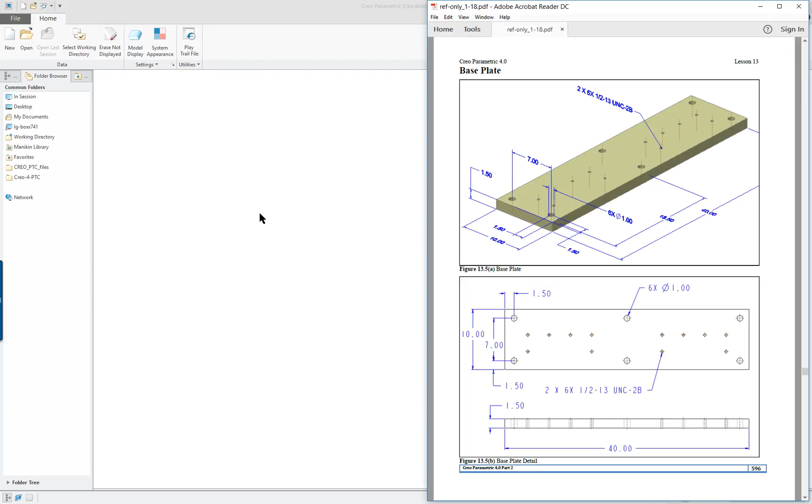In this section of the lectures for Lesson 13, I've broken them up into small pieces. This is just going to be to create the base plate. So we're going to create a new part.

It's coming in this odd shape because this is trimetric. I'm not going to go and change it to isometric, I'm just going to turn it a little bit. I'm going to sketch on the top datum plane in this case.

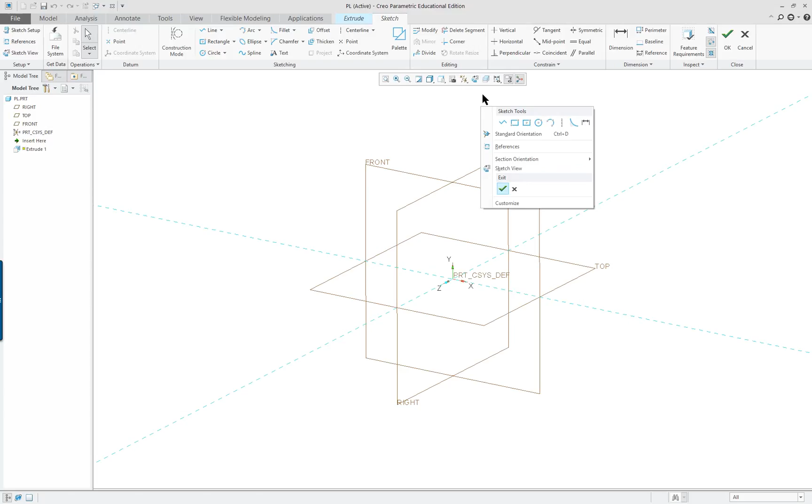Let's go over - you'll notice I put this in customizing my pop-up. I put the sketch view here; I got sick of going way up here for it. And I also put the center rectangle here on my pop-up.

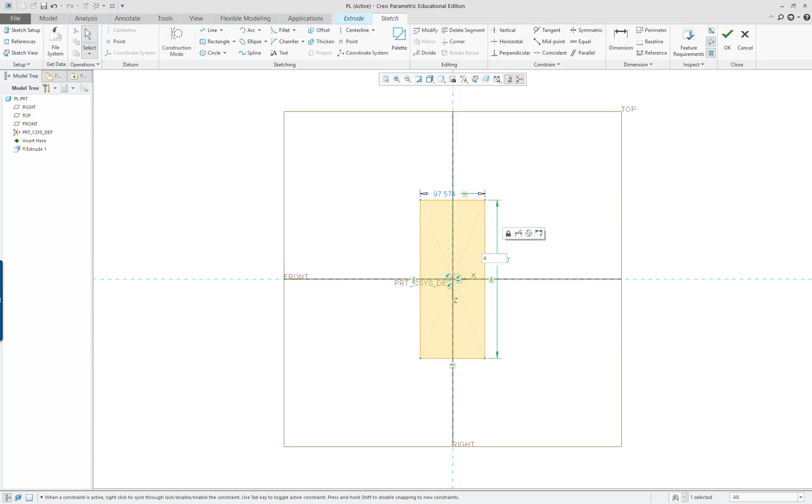This is supposed to be 40 by 10. So, 40, 10, Control D, and check. I think it's supposed to be 1.5.

Everybody wants to know why it projects so far. I have no idea - some calculation of the model in the very beginning and what it should be, I guess.

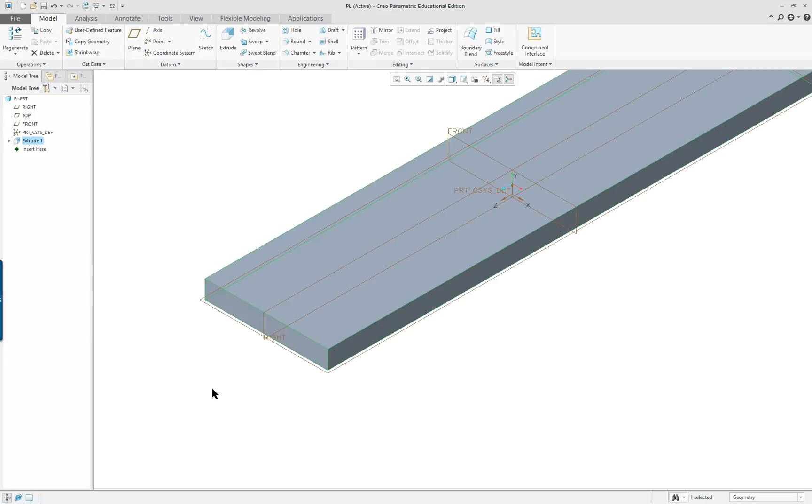So there's my simple shape, just a plate. Make sure you make these all a different color too. That's one thing I haven't been doing, and it's a good idea because you want the components to be different.

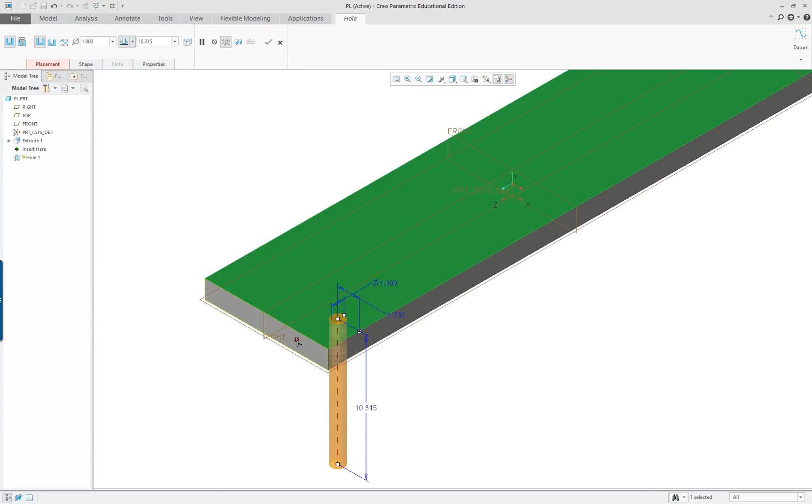All right, so let's go select right here and then use the pop-up to get the hole. We want to measure from this side and this side, like so. They're going to be 1.5 inches by 1.5. So the hole is going to be 1 inch, so we're okay there.

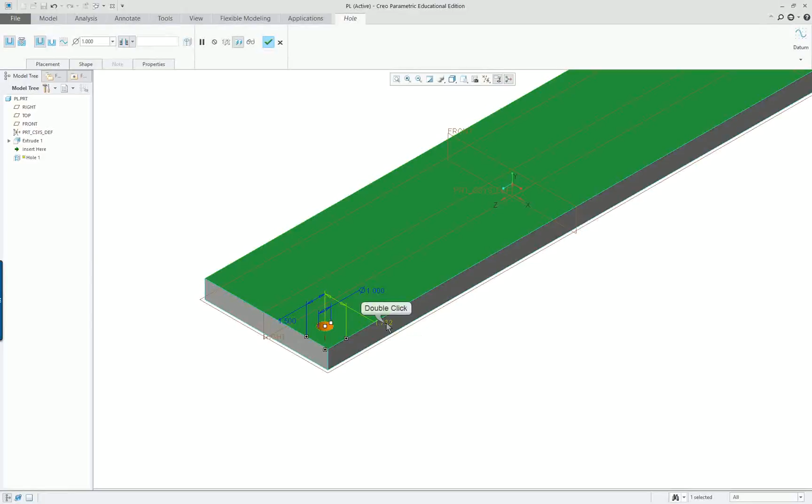This is going to be through all, and these two are going to be 1.5. Like so. Middle mouse button - you've got your hole. Right mouse button, I'm going to pick up the pattern tool.

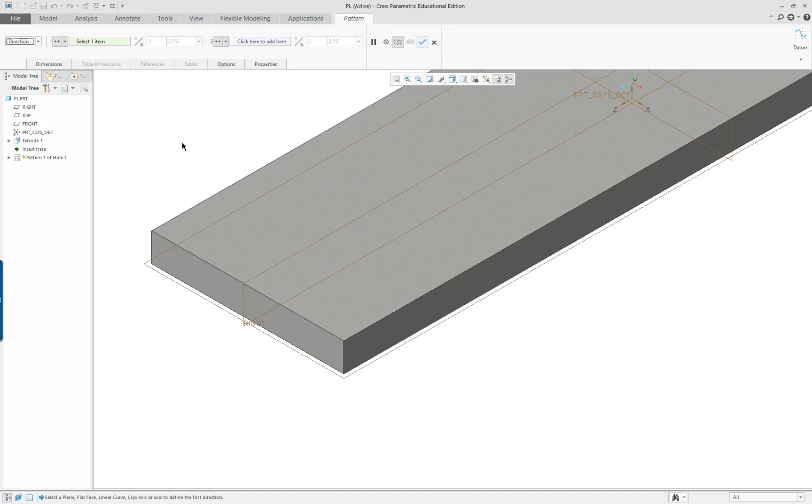And this time you can see the choices here. I want to go in and do direction. So we've done dimension, and we've done fill - this one is direction. The first direction I'm going to select is here.

So I really want it to go the other direction. I don't have to do it this way - I'm going to drag it.

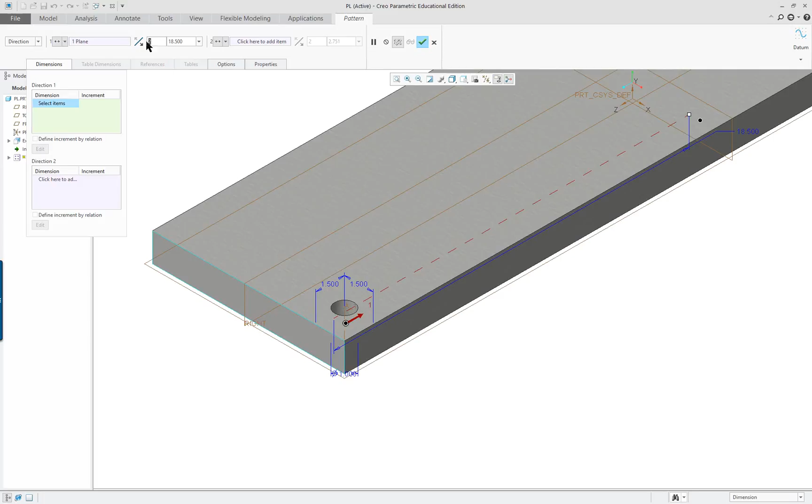And this one is supposed to be 18.5, and there's supposed to be 3 of them in that direction. You can see them.

In the other direction, again, you can hit your right mouse button to get that. In the other direction, I'm going to select this surface here. Oh, for some reason I had number 2 for that one - I've got to go back up here. This is the one that needs something in here.

Let's see what I've done. I'm going to click up into here. So instead of clicking over here and getting it, I'm going to click up here in this field. I'm going to select this one, and I want to go this way.

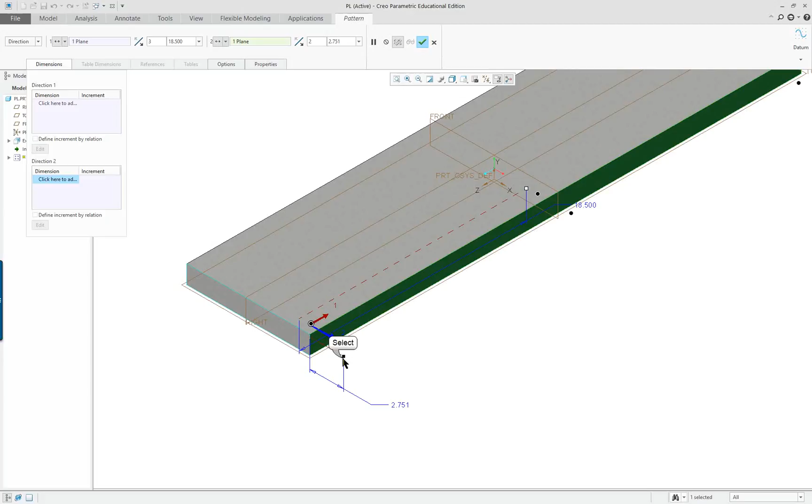And as I recall, it's 7 inches, and it's going to be 2 in that direction - 2 in one direction, 3 in the other. So that's a directional pattern. I tend to like using the directional ones, but it depends on the references that you want to use, obviously.

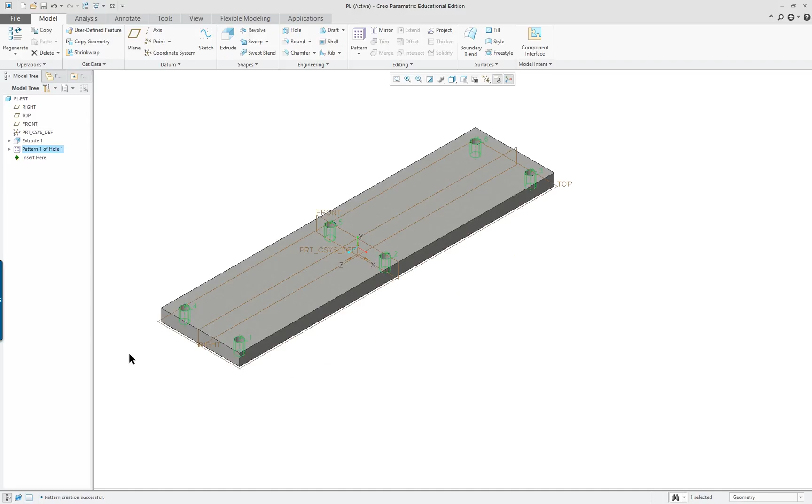All right, so we've got our component done. Let's go and make sure we've got our features all on. We've got our annotation display. I'm going to open this up and click on extrude and shift and over to the hole.

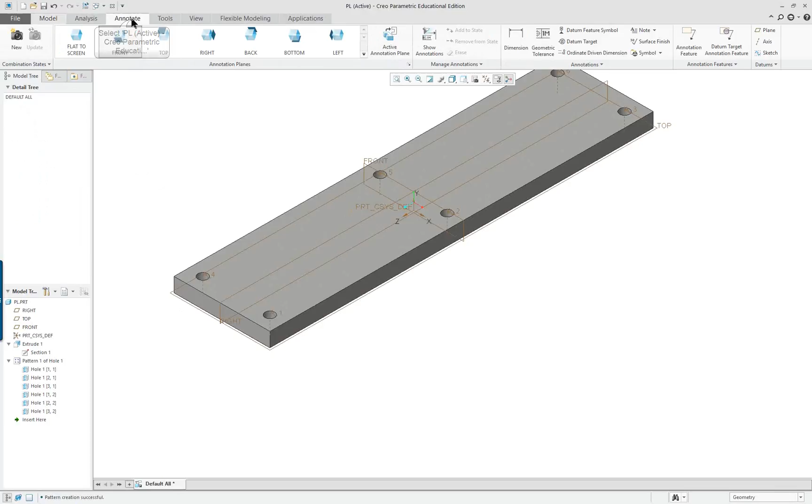All right, so let's click on annotate and select the extrude and the hole, show annotations, and we're going to turn them all on. And so the model-based definition of the part, 3D dimensioning.

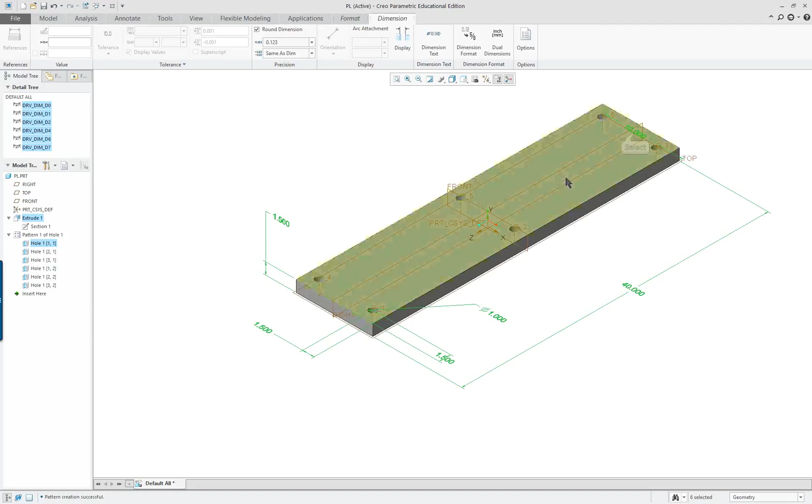We can start off by just moving our dimensions around a little bit where we think it might be appropriate. We have our hole here, and we have the distance to thickness here, or the width, I should say. So these are pretty nice positions for them.

We want to change anything about them - just click on it, right mouse button. So flip arrows, make it look a little bit better. So we're cleaning this up. We don't have to do a drawing - the model should have all the information in it.

You can see there's quite a bit of options on this one. On this one here, we want to flip arrows, like so. And if you click there and click on dimension text, we can add a little bit here - we can say in front of this we can put 6 times.

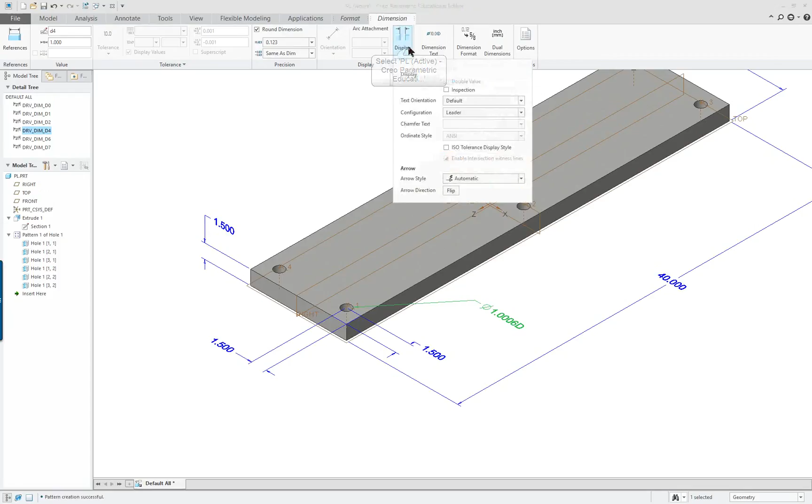Oh, I hit the wrong thing. There we go. So, 6 times diameter 1.

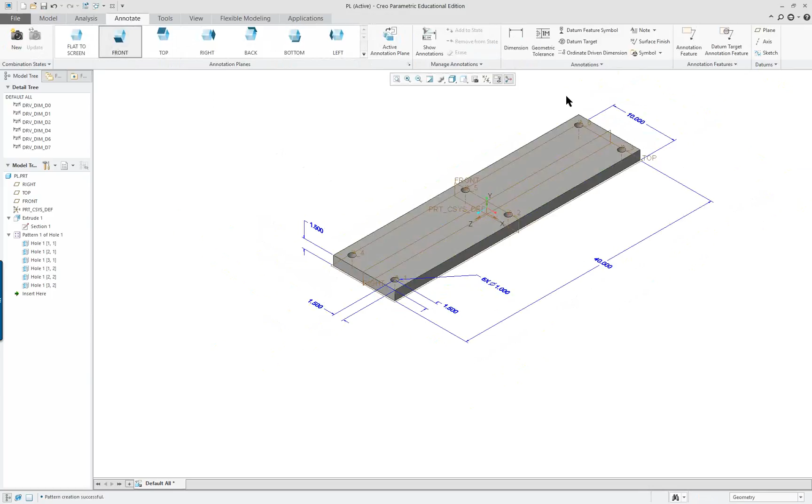And we have our dimensioned, simply dimensioned component. That's it for part 2 of lesson 13.